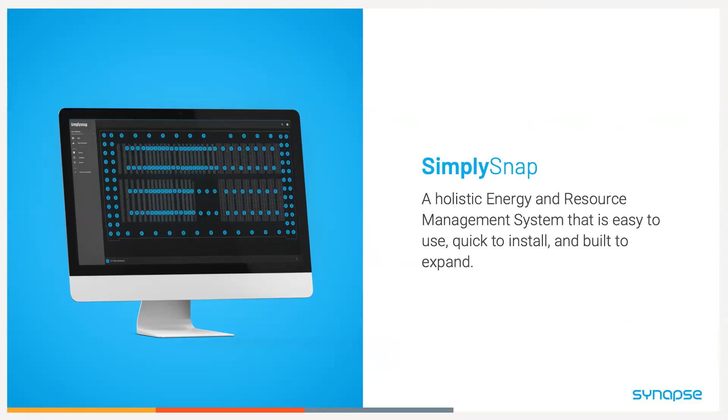So let's dig a little bit deeper into SimplySnap and energy insights. One of the things I want to zoom out real quick and talk big picture about is the amount of energy that the industrial and manufacturing sector uses. We had a study here from the U.S. Energy Information Administration, updated I think in 2020, that says that sector consumes about 32% of the energy produced in the United States.

That kind of blew me away. In terms of manufacturing and industrial companies, almost a third of all the energy produced in the United States is consumed by that sector. And if you dig into the numbers a little bit more, here's some stats from the US Census Bureau: the average manufacturing facility spends about $1 million a year on electricity. So a lot of their operating budget is going to just paying the power bill. And with those two things in the backdrop, top of mind, let's dig into how do we save energy at that facility.

So here may be some things if you've been tasked with the idea of, hey, we need to reduce the energy costs within our facility. Some things you may come back with: our utility costs are complex, it depends on the time of day, we have peak demand charges, and there's a lot of other variables in play. It's hard for me to pinpoint where we can actually reduce energy within the facility.

Who's actually consuming? We get the power bill every month, right? But no one knows, is it this department that's consuming the most energy? Is it this piece of equipment that's consuming the most amount of energy? It's really hard to pinpoint and put a program in place to reduce energy when you have no visibility within the factory where to focus your efforts.

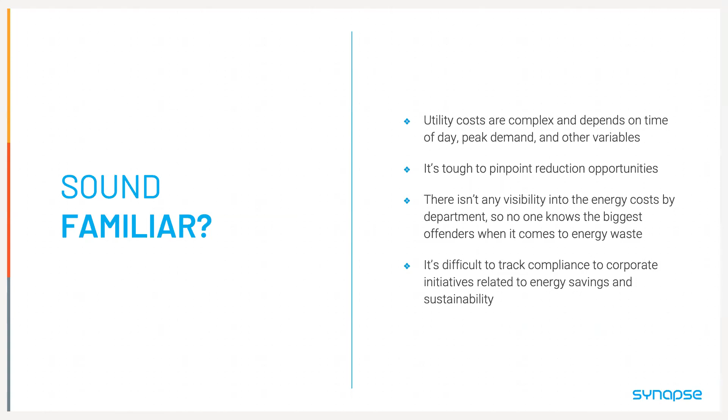That's the problem that Energy Insights within SimplySnap was designed to solve. We help you identify where the plant is wasting energy, and that enables you to develop a corrective action plan to optimize the energy usage within the facility, ultimately lowering the operational costs of your plant.

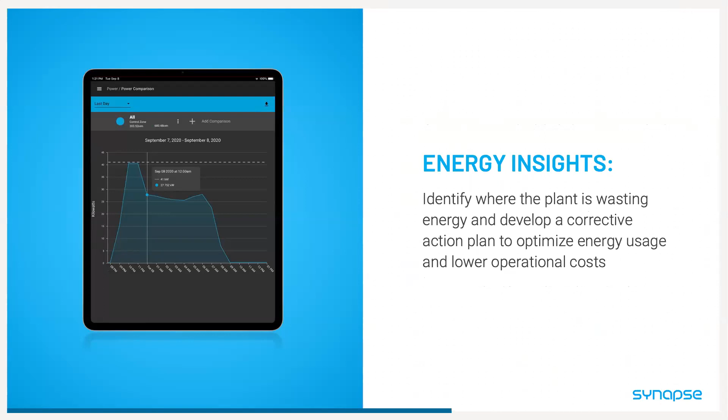So let's dig a little bit deeper into SimplySnap. SimplySnap's Energy Insights allows you to focus action to reduce energy spend by highlighting when, how, and where energy cost is occurred. You saw the stats earlier: the industrial sector consumes a lot of energy, but in manufacturing facilities it's hard to determine where that energy waste is occurring.

Our solutions begin with the data. In order to know when, where, and how energy cost is incurred, we monitor everything from the equipment to the panels and departments to actually the mains coming into the facility.

So we start by establishing a facility energy baseline model. We want to calculate in real time the energy cost and compare energy consumption across the facility. We expand that with sub-metering within the facility, either by department or production equipment grouped together, and we then actually put sensors on the equipment to understand what energy is being consumed by device.

We connect all those existing resources wirelessly, which means you don't have to run expensive conduit to all your equipment. That keeps the cost of the project down, and that's going to result in a faster ROI for you.

Once those devices are all connected, they communicate over our patented wireless mesh network. Once we start getting all of that data, with the equipment and sensors installed, we start measuring the flow of power through that facility. And when you start doing that, you can begin rolling up costs by equipment and department.

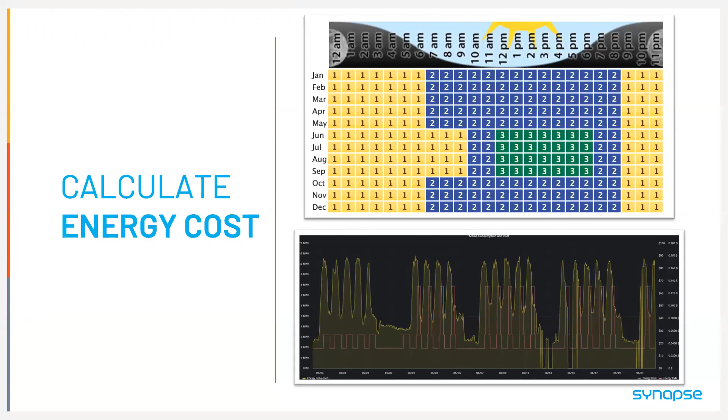Our energy algorithm within SimplySnap considers that complex rate structure, the different rates based on month or time of day, and the cost of peak demand in a given month. All of that information is compiled together to give you a complete view of what and who is consuming all the different power inside your facility.

But it doesn't end with just pulling the current clamps and sensors and looking at the equipment and panels. We know that you don't think about sensors or current clamps — you think about equipment, you think about the departments within your facility.

SimplySnap allows you to associate the power readings with specific equipment, and then you can place the equipment into departments. So whether you're looking at the power consumption of a piece of equipment or an entire department, SimplySnap makes it easy to visualize that data. Here's an example of that.

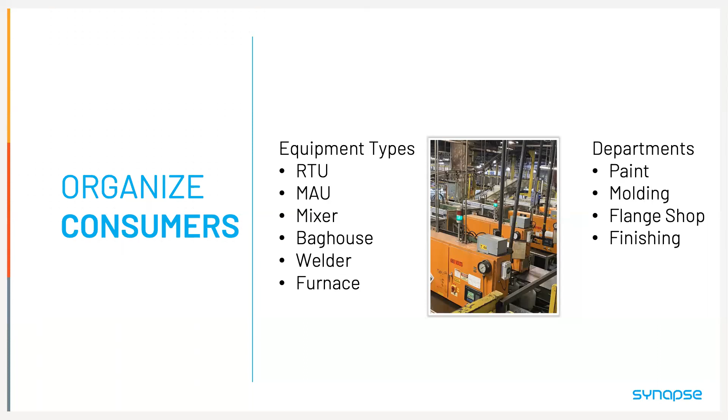So if you've got sensors on, for example, the RTU, the baghouse, or the welder, or you've grouped those together into the paint department, the flange shop, or the finishing department, you can group all those together and see the dollar amount consumed in those specific departments or by that equipment over the past week. What did that department cost me in terms of energy?

So once you have that data, once we've monitored the equipment, we've got the mains, we've got the panels monitored, then we convert that power data into cost and group that data by equipment and departments, providing the user the ability to see where to focus the investigation.

A general manager in a facility will often review data that looks like this with the department heads, maybe on a weekly or monthly basis. That group wants to prioritize investigations into how to reduce energy costs.

In this view, the general manager can see the facility's total usage over a period of time. The Pareto charts at the bottom of the screen provide a good way for facility management to prioritize improvement activities. The general manager can see the top cost departments, the top cost equipment types, and now has a clear way to prioritize investigations for the department heads.

Energy use varies greatly by the production schedule too for most facilities. We can enable the user to select weekdays, weeknights, or weekends to view the cost, which correlates to many production schedules. Then it's up to the team to take whatever action they need to solve the problems within those departments regarding energy cost.

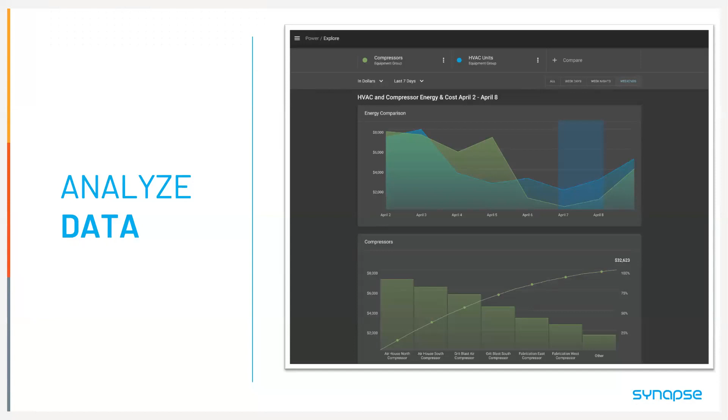At the end of the day, a lot of times you've done these projects, you've got plans, you've got all these things going on, but you've got to generate a report. Someone in upper management or within the plant wants to know how things are going. Within SimplySnap, we have the ability to generate these reports.

There will be other users that may dig into the details within SimplySnap, but other users just want a PDF emailed to them. Whatever the case, we have the ability to create these custom reports for you and deliver the information you're looking for to report on those sustainability initiatives occurring within the factory, coming down from headquarters.

Let's talk a little bit about how energy insights work—what do you need, what are the pieces of it. I'm not going to go into a lot of detail here; there are other resources on our website that can provide more detail about how energy insights work. But I wanted to spend a couple minutes to show you at a high level what things are needed and the versatility we have within SimplySnap.

I mentioned that we can monitor the electrical circuits. This could also be the mains coming in, or it could be individual pieces of equipment. Whatever information is there, we're going to connect a CT, a current clamp, that's compatible with that particular piece of equipment.

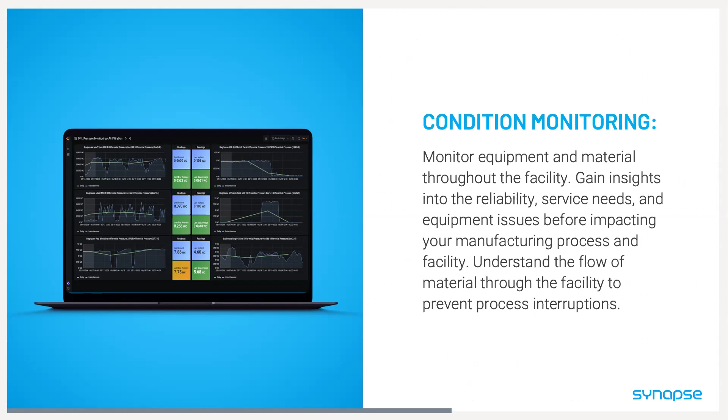Within SimplySnap, the condition monitoring capability will help you monitor equipment and material throughout the facility. We want to help you gain insights into the reliability and service needs and equipment issues before impacting the manufacturing process. And we want to help you understand the flow of material through the facility to help prevent those process interruptions. Again, like I mentioned on Energy Insights, what condition monitoring is there for is to help you focus action and highlight the potential issue on critical resources before they cause unplanned downtime.

In manufacturing facilities, we know that unplanned downtime is very costly. It's costing tens of thousands of dollars per hour in lost revenue. There's labor costs associated with people just sitting around. There's material costs. They're just sitting there when nothing's moving.

And from our experience, unplanned downtime really comes from three different areas. Downtime occurs when critical process equipment fails, like a motor. Downtime occurs when processes don't have enough material to produce. You run out of powder to fill your fire extinguishers, for example, or when the facility is outside of some type of environmental or safety standard. Those are some of the most common sources of downtime.

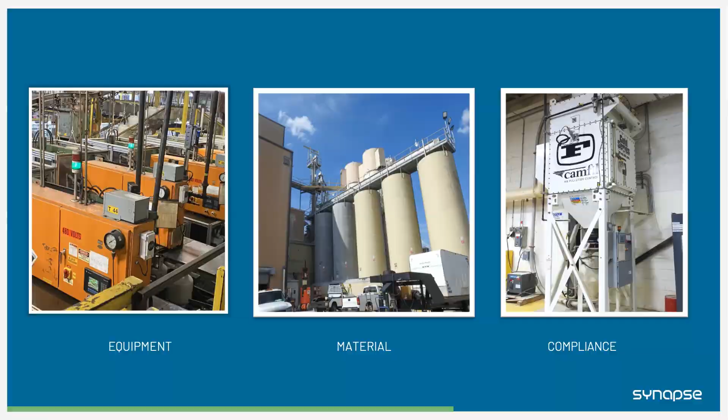So knowing that those are the sources, again, it starts with the data. What SimplySnap can do is support a wide variety of off-the-shelf industrial sensors. Whether it's the volume of a powder silo, the flow of compressed air through the facility, or the temperature and vibration of critical motors on the conveyor belt, through generic 4 to 20 milliamp sensor interfaces or other serial interfaces, SimplySnap can take that data from the sensors you put on the equipment and present that information to the user within an easy to use, easy to read user interface within SimplySnap.

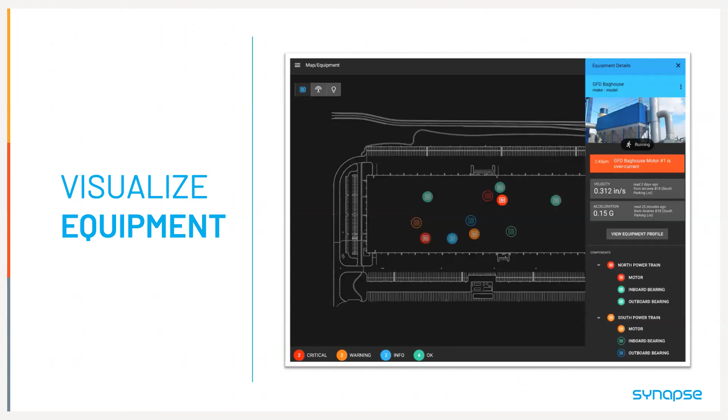Once you've got all that data coming in, people in manufacturing don't think about sensors, they think about departments and equipment. So once you have the sensors on your equipment, one way to group that information is by equipment. In the case of a bag house, for example, you may be monitoring the differential pressure between outside air and filtered air to measure the life of the filter, or you may monitor the motor driving the system. Whatever the case, you can group these sensors together and visualize that as a specific piece of equipment, so all the sensors are grouped to give you a quick view of the state of that equipment within the facility.

And again, this is all with generic sensors. 4 to 20 milliamp sensors are available - there are hundreds, if not thousands, of different sensors out there that can be placed onto this equipment to give you the data you need to see trends and how things are behaving in the factory.

Once you have that data and trends of how the motors are operating, or how the differential pressure in the filter of the baghouse is working, you need to know when something is going to go wrong without having to constantly monitor that equipment on the floor or log in to SimplySnap to view the trend lines. Once we've started collecting that critical performance data, SimplySnap can use our triggers feature to automatically send a notification when a sensor on that equipment crosses a configured threshold.

Our solutions delivery team sets up recipients of those notifications and the rules that dictate when an incident is sent out. SimplySnap can send an SMS or email to any particular group of people you want to know when a certain sensor on a piece of equipment has gone out of range, out of spec, via text or email. So you're able to get that information and then react to those thresholds.

And these could be proactive notifications. So if, based on the trend of how much current or power a motor is consuming over a period of time, that exceeds a threshold, that could potentially show the motor is about to fail - you could get alerted because of that. Or if the differential pressure in a filter starts to exceed the safety threshold you've recognized, you can act on that without having to just change it on some type of schedule. You can change it when it's needed.

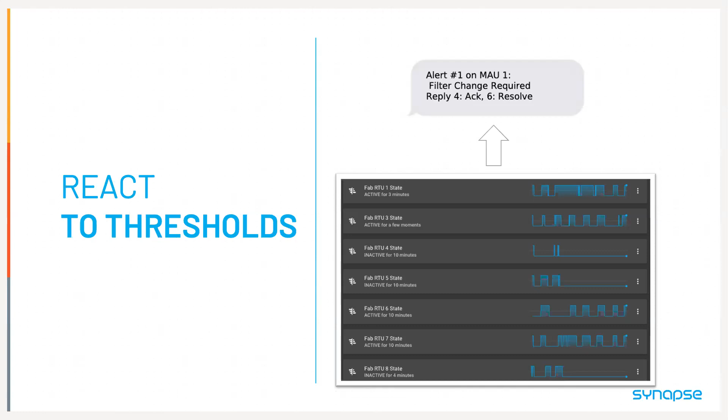So many issues and improvements can be detected by looking at past trends and comparing with similar equipment. SimplySnap exposes that sensor data in interactive time series dashboards, and by looking at the data over time you can identify trends and anomalies, which can help provide early detection of failure. All of those pieces combined help you reduce unplanned downtime within the facility.

So how does SimplySnap condition monitoring work? What are the pieces you need? Very similar to Energy Insights, it's not too complicated. There are a lot of different sensors out there, whether 4 to 20 milliamp or some other type of serial interface. They connect to a couple of our devices, the Sense 4-20 or our Sense 485 wireless sensor interface, and they wirelessly communicate back to our site controller. Then via a cloud interface through SimplySnap, you'll be able to see all those trends, take action, and receive triggered notifications when certain things exceed given thresholds.

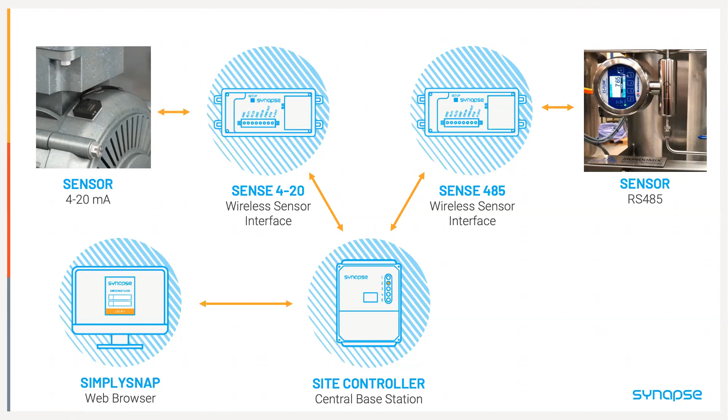So some key benefits of both of these solutions: all of this is going to be easy to install on existing equipment. I mentioned it earlier, everything's wireless, and oftentimes these devices are battery operated, so you don't have to run conduit to them.

You're going to be able to detect anomalies through equipment performance when the equipment changes or something different happens than what you'd expect. All that helps reduce unplanned downtime. It minimizes equipment backups and all the things you have to keep in storage to solve maintenance problems when they come up. You'll gain insights into how effective operations are within the facility. The goal really is to identify issues before catastrophic failures happen, and then schedule maintenance - have a planned downtime rather than unplanned downtime.

All of this data, the information that we're bringing in is going to help you establish baselines. You're going to be able to set warnings and thresholds based on the normal operating parameters within the facility.

We've got a few minutes left, and I want to go through some real world examples that we've had over the past couple of years, how customers have used this, and some screenshots of different scenarios that we've seen in our customer base.

So SimplySnap Energy Insights, for example - I mentioned that our energy insights and the visualization can provide a unified view of that energy data, whether it's across facilities or across departments. You're able to monitor the facility equipment - that could be lights, HVAC systems, compressed air systems, the flow of utilities through the facility, or the machine state of various equipment. There's a lot of different things that you can monitor in terms of getting that information.

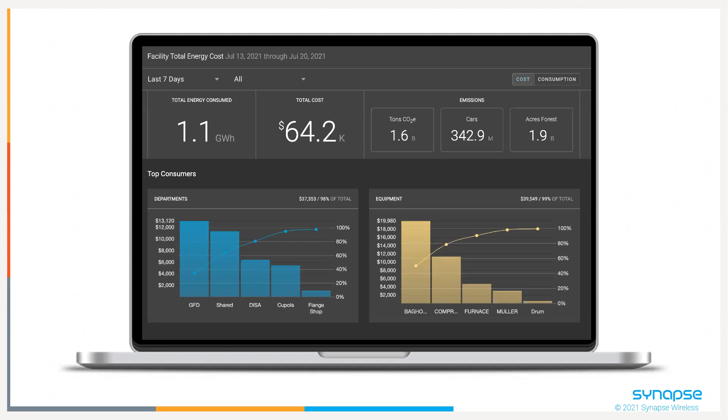Digging a little bit deeper, you can actually compare energy consumption. So if you have the flange shop, the Muller, and the DISA department, and you want to compare energy consumption across those departments, we make it easy to do that as well. On the bottom of the screen, you can see all those departments lined up, who's the biggest consumer, and where you can focus your attention to make the biggest impact in terms of improvements.

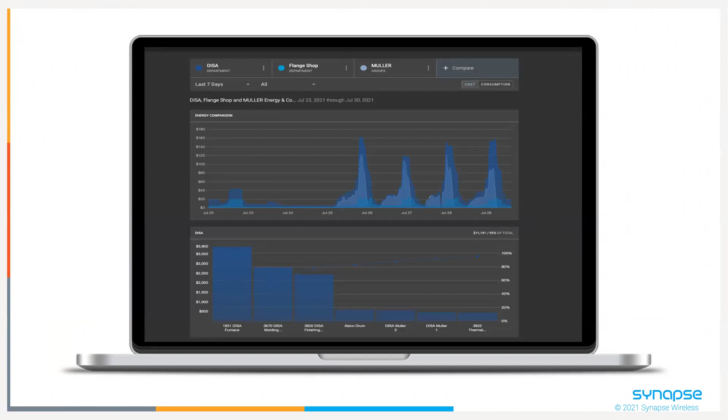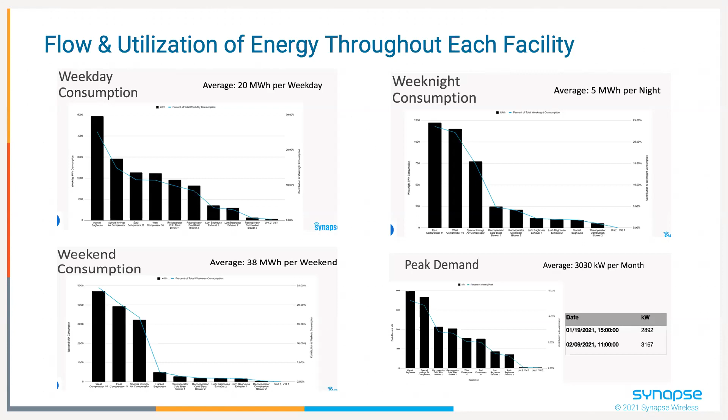I mentioned earlier about the different types of timelines we can use, whether it's weekday, weeknight, or weekends. You can look at all the information and see during typical production hours who's the biggest user, and during the weekends, maybe when no one's around, who's using the energy. The bar on the far left at the bottom is a department that isn't even occupied - that's one scenario this particular customer had, departments that weren't even occupied on the weekend but were consuming a lot of energy.

So they were able to focus their attention on that and reduce the amount of energy in those particular areas. And then I mentioned earlier about scheduled reports - here's an example of one of those reports delivered to the management team so they can understand what their total energy cost is, what their baseline is, how much they've saved on that baseline from actual consumption, and by department or equipment type, how things are progressing.

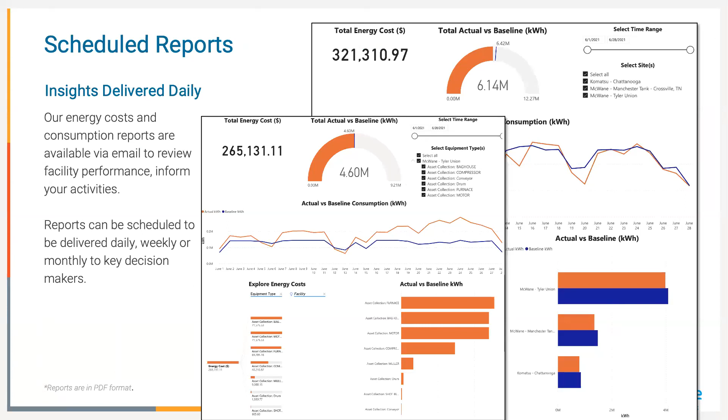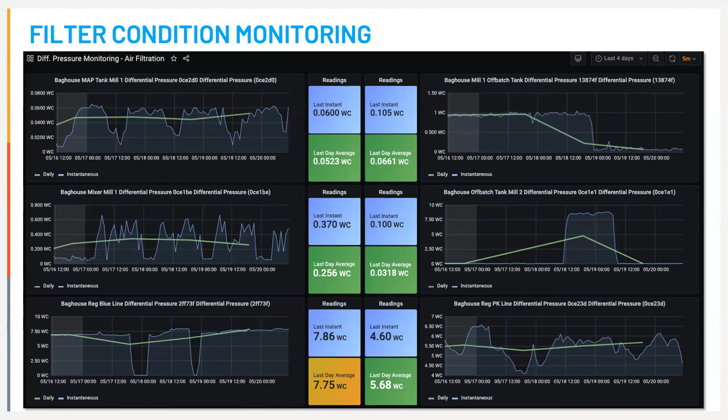Similar, some real world examples of SimplySnap condition monitoring. Here's some examples of the differential pressure in filters within a bag house - 6 different examples of readings that have been archived and retrieved from different pieces of equipment. You can see the trend lines placed on there, how the bag house differential pressure and its state, and identify any things that look like anomalies that you can then go in and figure out how to fix.

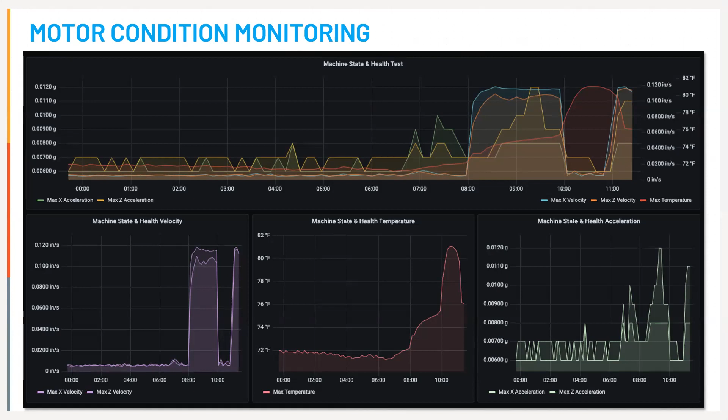On the production uptime side, there's the machine state and health of motors that may be associated with that particular piece of equipment - not only the differential pressure of the filter within the bag house, but also the motor running it. So here's that data - I've got sensors monitoring pressure, velocity and temperature of the motor, maybe the acceleration of the motor. I can pull all that together into a single dashboard that shows me the health and status of that particular piece of equipment. Here's all that information rolled up into a single view within SimplySnap.

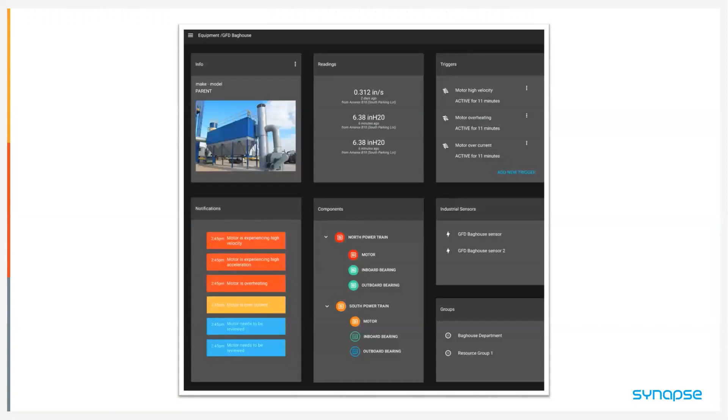Another example we've had from a customer is their material flow through the facility. This particular customer actually ran out of powder within their silo bins, because the guy who normally checks whether there's enough powder in the bin was on vacation or out sick. He wasn't on the job that day.

And so they had a plant shutdown because they didn't have powder in the silo. Well, with SimplySnap, they were able to put in a 3-dimensional sensor that measured volume. When that volume sensor goes below a certain threshold, it triggers an alert and creates a work order to load the silo with more material stored on site. So they've eliminated relying on someone climbing a ladder with a clipboard, and instead have actual 24/7 monitoring.

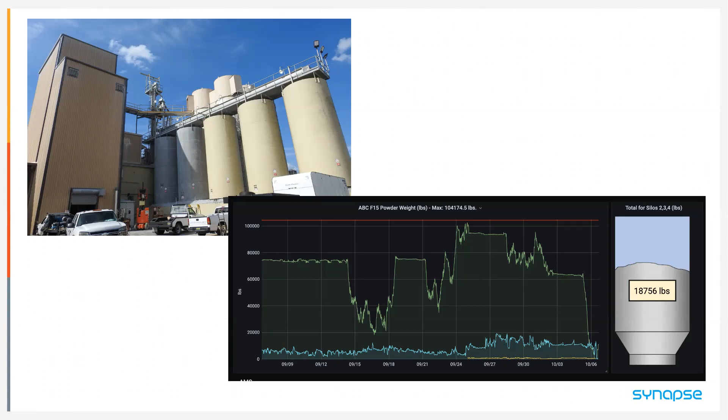So those have been some real world examples of both energy insights and condition monitoring. And by the way, we've only scratched the surface of what SimplySnap can do—probably about half of its capabilities. We spent a lot of time on energy insights and condition monitoring.

But what we've seen is that within SimplySnap we actually have a whole other side that does control. I mentioned starting with the big three, and let me explain that a little bit more.

What we've seen is that there are really three main areas that are pervasive across most manufacturers that contribute a lot to the costs associated with power and energy consumption. Addressing those issues can help meet energy and sustainability goals. We call those three common things the big three, and the Department of Energy highlights them as some of the most common, biggest consumers of energy in a manufacturing space.

Those big three are lighting, HVAC, and compressed air. If you can reduce the energy consumption of those big three, you'll be able to reduce the energy footprint of your manufacturing facility and help achieve those sustainability goals.

We have control solutions that help with all of those. I didn't go into that today—we can reserve that discussion for a future session. But for example, monitoring bag houses, monitoring thermostats, monitoring compressed air systems, monitoring lighting.

Here's the key piece: everything we've shown today in terms of condition monitoring, energy insights, even the control aspects like controlling your lighting, compressed air system, and HVAC system—that can all be done with a single product. That product is called SimplySnap. That single software package from Synapse can control, monitor, and manage all these disparate pieces of equipment within your facility, all sharing the same information, with a great user interface where you can see the data you're looking for, generate reports, and share that with your executive team.

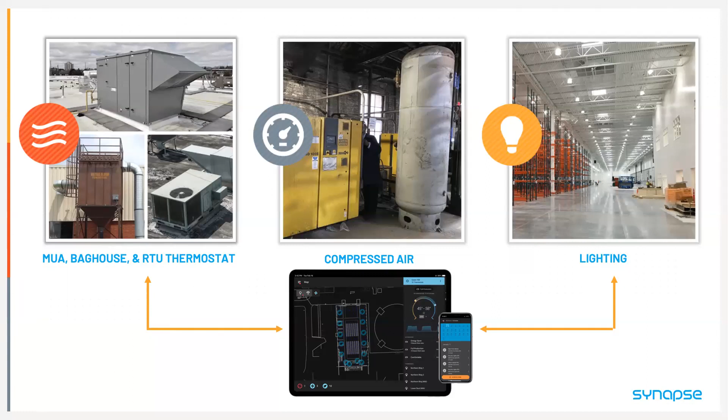I'd be remiss to go through this presentation without letting you hear some of the feedback we get from our customers. We are very passionate about delivering a great customer experience, whether through our user interface, our on-site commissioning services, or our customized engineering services. We want to make sure you're getting what you need and that we're helping solve the problems in your facility, with a little bit of that Southern hospitality.

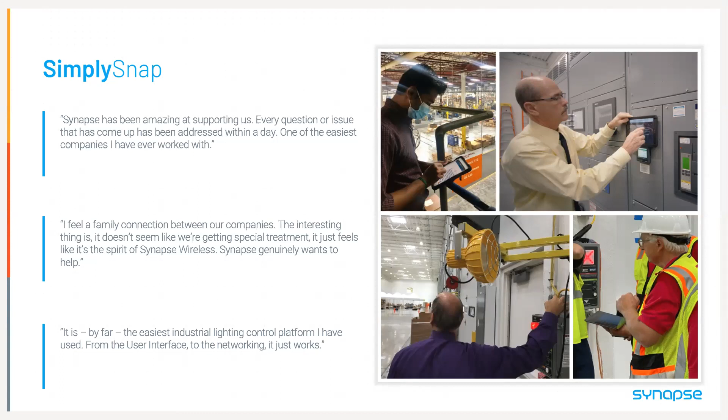And here are some examples of other folks within the industry who've had experience with us and their feedback. So, to wrap up today's session, I wanted to finish with a quick recap on what I call the SimplySnap advantage.

We provide a holistic platform that can be used to manage disparate systems from other vendors, regardless of age or type. For that key energy and performance data trying to solve those problems, you can rely on SimplySnap to provide that holistic view of your facility.

Rather than upgrading your entire factory to new equipment to gain those efficiencies, SimplySnap allows you to connect to existing equipment and begin understanding how to control what you already have in a more efficient way. It's going to allow you to gain the benefits of industrial IoT, and get started on those efforts without a wholesale upgrade of the systems in your plant.

You'll be able to utilize SimplySnap for the same type of benefit you'd get from hefty investments in modern equipment, but you'll be able to add SimplySnap to your plant and meet that stringent 2 to 3 year payback period.